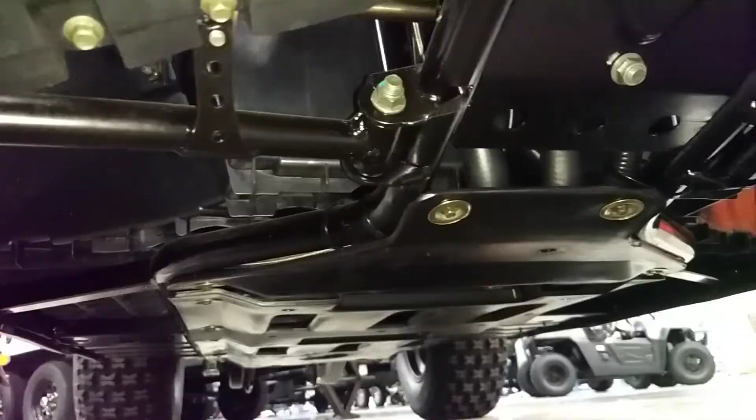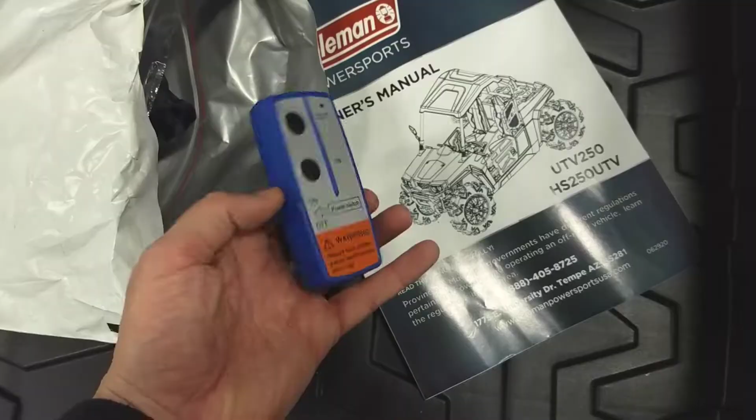The Coleman Power Sports 250 UTV Sport. Let's look at the quality of the build, the parts, the engine power and specs, size and price, top speed rating, and even something I'm really excited about on small engines, fuel injection. We'll throw a quick compare to the competition, resale value estimate, and wrap it up.

When I ran across the 250 UTV Sport at a local Camping World, I had to start checking it out further. It's like a miniature full-on sport UTV with fuel injection, good internal roll cage, heavy-duty chain and drivetrain, and much more. First up, quality of the build from initial inspection.

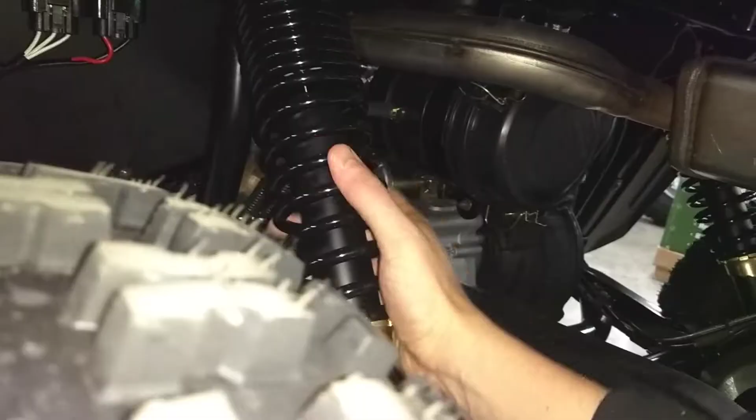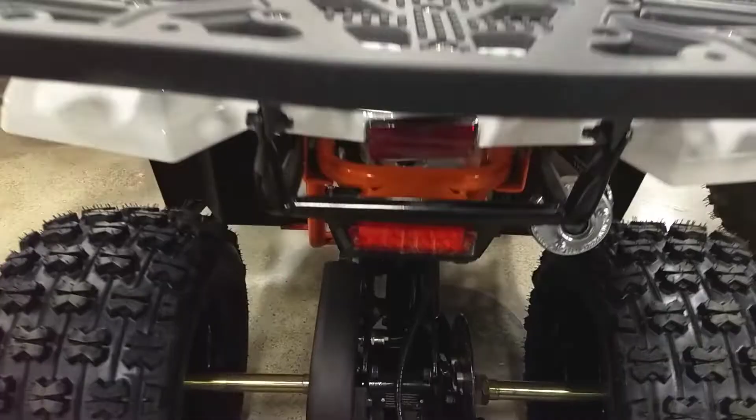Coleman Power Sports has been making some major waves this past year, and I'm more and more impressed by their product manufacturing decisions as time goes on. From the mini bikes, of which I own several Coleman mini bikes and have many videos on, to their go-karts for kids, and even their small ATV build quality far over that of its small-end competitors, and much higher quality for those of a comparable cost.

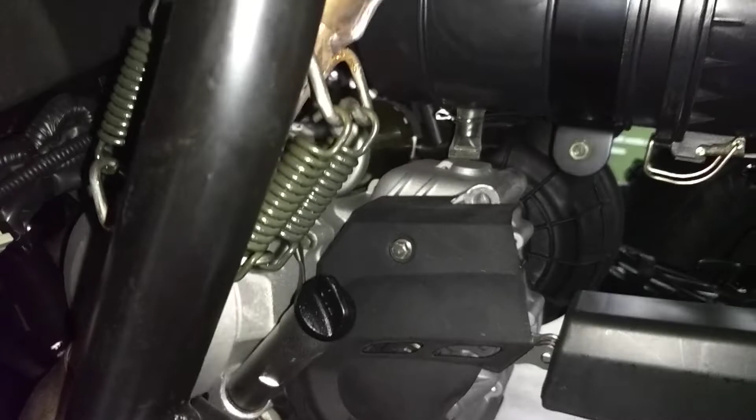The quality of the build on the Coleman 250 UTV Sport was enough to say my expectations were far too low, and they showed me I needed to reconsider value in that this was a decent build.

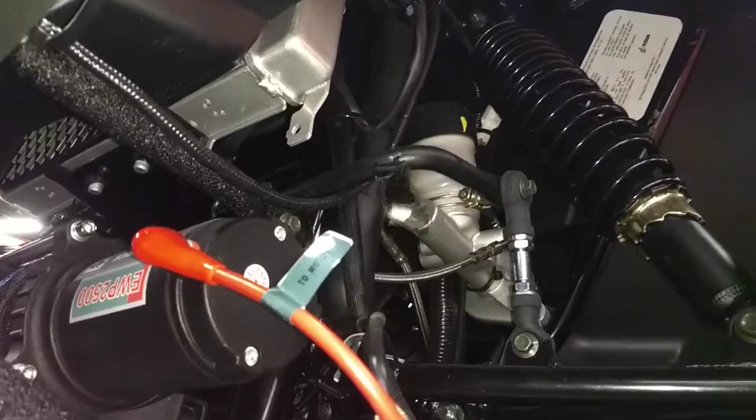The undercarriage had nice skid protection. The frame and details on safety bars were nice. The wiring was solid and secured. The drivetrain strength was very impressive to be able to take the needed torque from the engine's power. Considering this was a kids UTV, I expected far less.

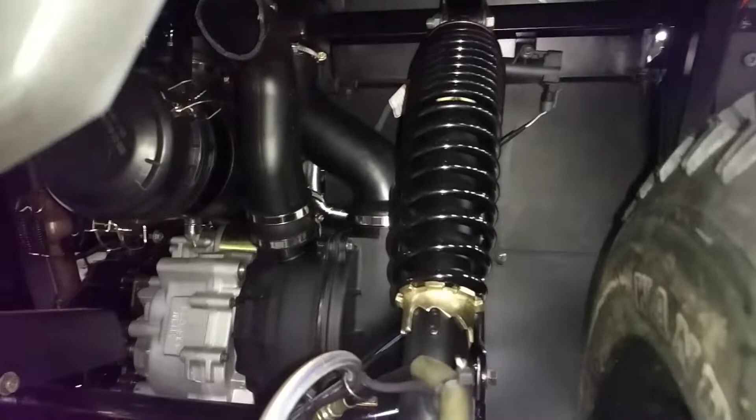The only one point I felt could use a little bit more attention was the seat quality, I did feel was lacking. Thankfully, it was adjustable, however. I probably wouldn't have even seen it as a drawback, but the rest of the UTV actually started raising my standards much higher as I became more impressed, and the seat looked like it didn't belong.

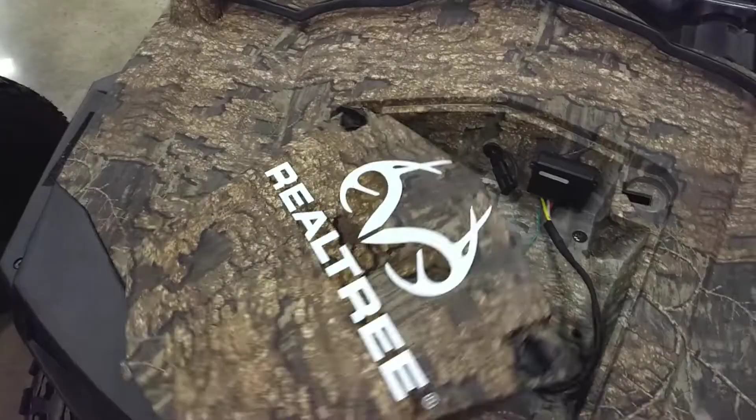Plenty of grease zerks, easy access to non-engine parts for maintenance over the years. The engine is tucked up in there a bit, but that's more of a convenience than a quality issue at all. Good to have it out of the mud and the grind.

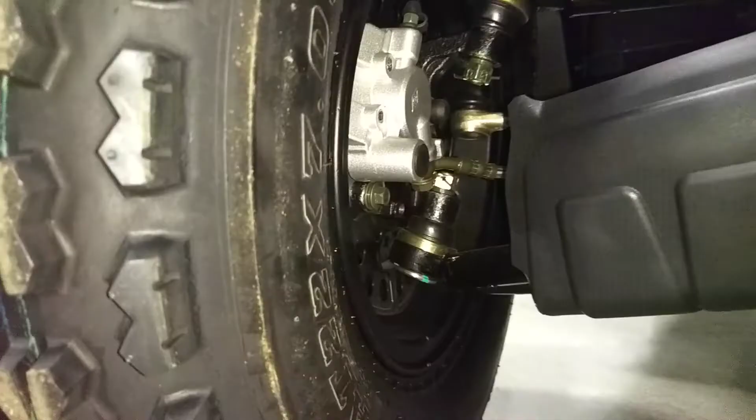Going right into parts, engine power and specs. Mechanical power steering system meets up with a dual front disc brake and rear axle disc brake.

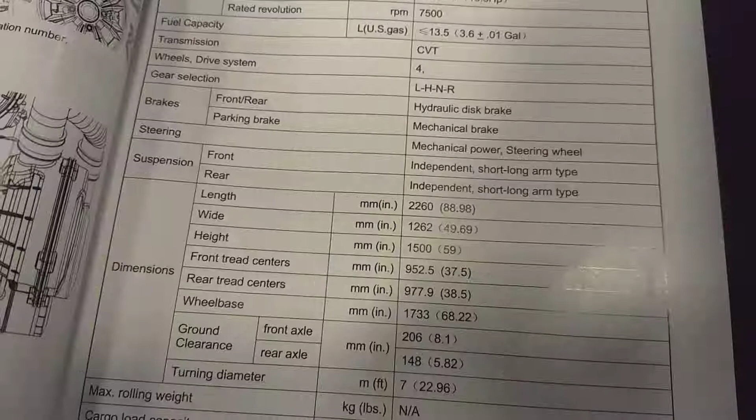This UTV is a kid-size UTV at just over 4.5 feet tall, 4 foot wide, and just under 7.5 foot long. This UTV weighs in at 800 pounds dry weight. Wheelbase is 68 inches or just over 5.5 feet with a ground clearance of 8 inches. A CVT transmission system is coupled with a high and low manual speed gear setting with neutral and reverse.

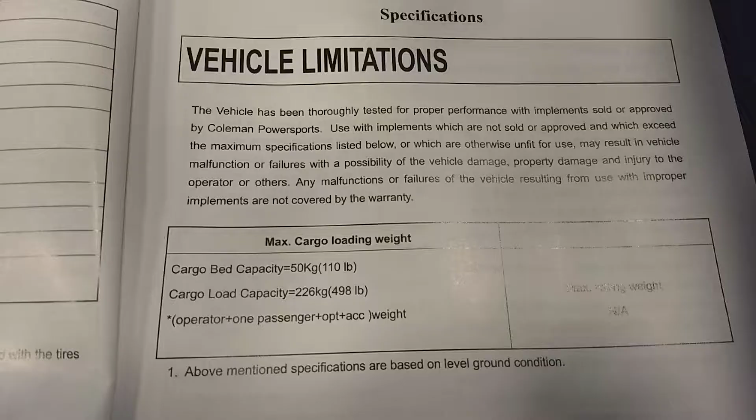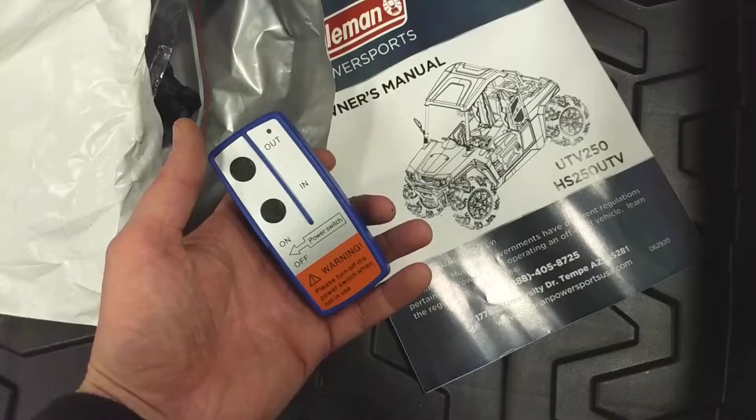The carrying weight is 500 pounds capacity, in which 100 of that is for the bed in the back, which is nice to put the kids to work. I mean, earn your keep, kiddos. Haul daddy's deer out of the brush. You kids are small, you can get in there through those thorns better anyway. And don't worry, there is a remote-controlled winch to help you out.

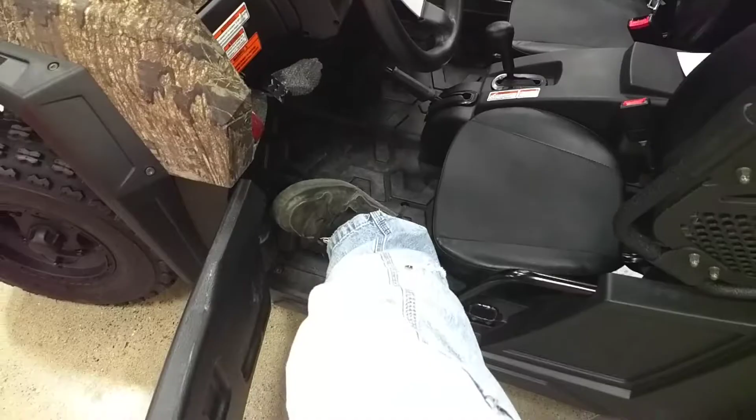Myself, standing at 6 foot tall, I was unable to get in the UTV with the seat back all the way. Others that were just under 5.5 foot tall could fit in but not move their legs. For safety of being able to actually move your legs from gas to brake, you may be looking at a 4.5 foot tall cap to a 5 foot tall stretch, depending on your legs.

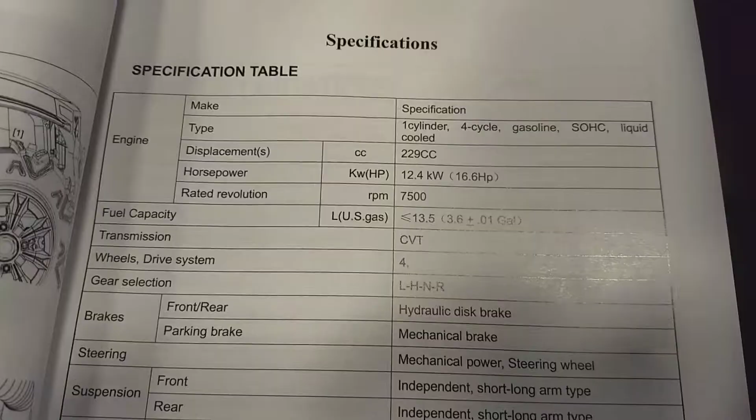The engine is a 229cc fuel-injected, liquid-cooled 4-stroke. Coolant reservoir is located up in the front. Engine is rear mounted. The engine is rated up to 7,500 RPMs and rated at 16.6 horsepower, which is more power than you may be giving it credit for, and its competition may be trying to keep up.

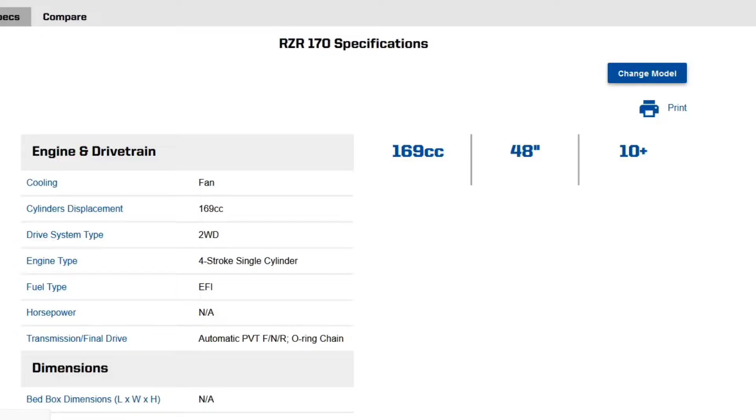So top speed, let's talk about that keeping up factor. It goes 70 miles per hour, just like the speedometer says, right? Well, based on my YouTube stats, if I say it has a low top speed, I lose half the people watching the video, and that's for real.

But don't think that with a tweak here or there the engine can't output 30% more power and double that top speed when you pull some restrictors. Well, safety first—this is a kids UTV, so let's take its top speed and competitors and jump into something really cool that, yes, involves turbos.

The top speed is, drum roll please, 10 miles per hour in reverse, which is actually a really decent reverse. 8 miles per hour on low gear, and a whopping 25 mile per hour rated top end. And also, yes, it's a 2x4 drivetrain, but there was product packaging that makes me wonder if a 4x4 version will come out.

But yeah, 25 miles per hour. What about the competition though? Let's look at the Polaris RZR 170, which comes set at 15 miles per hour to begin with, but adjustable to 29 miles per hour through adult controls.

Is there a way to bump up speed on the Coleman 250? Get me one and I will double it. However, if you're driving off-road hitting huge bumps at 25 miles per hour, you may find out why a slower speed is better in a sport off-road four-wheel vehicle. I don't see too many people taking ATVs more than 5 to 10 miles per hour on heavy bump trails anyway, and this isn't exactly a flat street-minded vehicle.

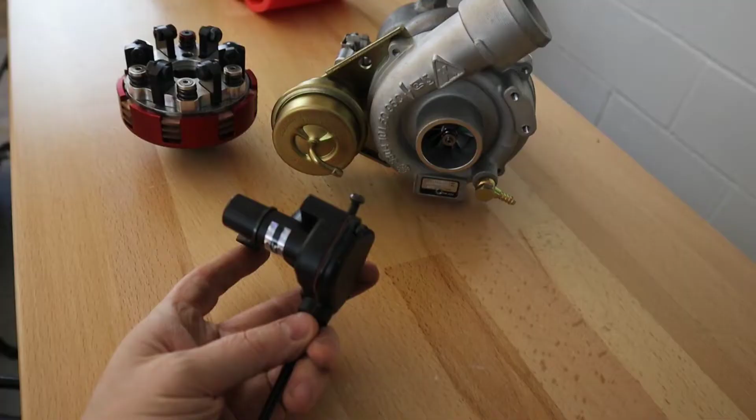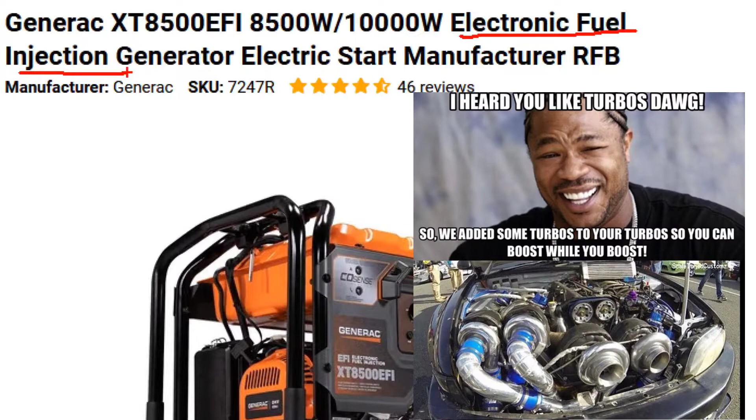So why is it exciting for me to have a small fuel-injected engine? Well, turbos, because turbos. Now this is not a turbocharged engine, but fuel injection on small engines has been around for some time and difficult for me to get hands on all the needed parts when looking at other brands. Or it's been expensive for EFI generators like the 400 series Generac, the 230cc size, 120cc size, fuel-injected inverter generators that are out there today. The Coleman Power Sports 229cc engine is already close to 17 horsepower, much closer to what I've been looking for in a small engine turbo build that could pump out some boost numbers.

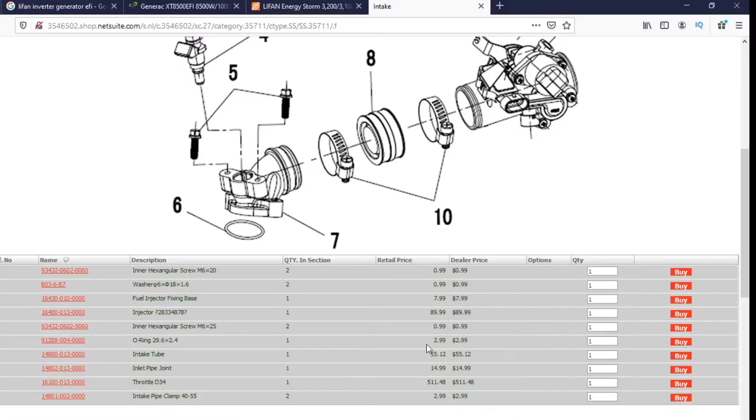Sadly, it's still about $1,000 in just parts price point for that EFI controller and injector setup, which is a little surprising—it's close to 1/5 of the cost of the entire UTV, which sells for $5,500 US. Or you could spend lots of money on a membership for Camping World and get some discounts. There's a $500 destination charge, about $200 to $300 in assembly fees, and then tax cost.

The Polaris RZR 170 MSRP is about $5,300 and is a 169cc EFI engine that weighs only 532 pounds. But it doesn't come with things such as the roof, the windshield, or a remote-controlled winch. The 250 is a newer model, but if you pull up a Craigslist listing for a 10-year-old RZR 170, there are a couple people asking around $3,500 to $3,600. So hopefully you can see where about your retail value is.

Final notes. At the time of making this video, the UTV was so new it's not even found on the Coleman Power Sports website, and I believe it's only exclusive to Camping World at this time. Top speed seems low if you compare it to a car, but surely someone can get in there and easily make this a much more dangerously fast ride for those kiddos with a decent amount of power output. The cooling system tells me to expect longevity. EFI tells me that I don't need to worry about clogged carbs, which is huge.

2x4 is my personal hang-up. At 800 pounds, if that thing gets stuck, I'm glad it comes with a winch, so that levels out a little bit. The placement of parts looks well designed for off-road. The ground clearance is nice. The seat is a little lacking, and I'd likely want to do something with it, but that's because I mod everything I get my hands on anyways, and everything else is looking pretty solid.